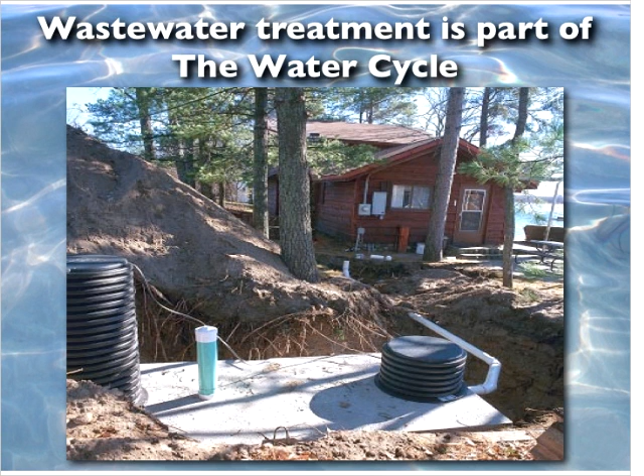Well, basically, this slide illustrates that the wastewater treatment is part of the water cycle. It shows what we typically see in our neck of the woods here in Northwest Michigan, the quintessential cottage on the lake with the wastewater system. Here we just have the septic tank, and it illustrates how close everything is, that we're dealing with a lot of fresh water, and we want to do our best job possible to protect that water. And we have certain requirements that we have to abide by to do that.

And what we typically try to do in these cases is size the tank appropriately based on the design flow from the house. Usually, in the case of a house, it is determined by the number of bedrooms. And at least in my neck of the woods in Grand Traverse County, we allow 150 gallons per bedroom as our design criteria. So if this is a 3-bedroom house, then we would be designing for 450 gallons per day.

And in our case here, we would have a 1,200 gallon septic tank. What's optimal would be 3 days of retention time.

And then as the wastewater flows out into the soil absorption system, or dispersal field, as I like to call it, we have a couple of actions that are going on. We have the water infiltrating, being absorbed into the soil, and going down through the soil and being treated as it goes, hopefully, and eventually it will reach groundwater and vent out to a lake or stream.

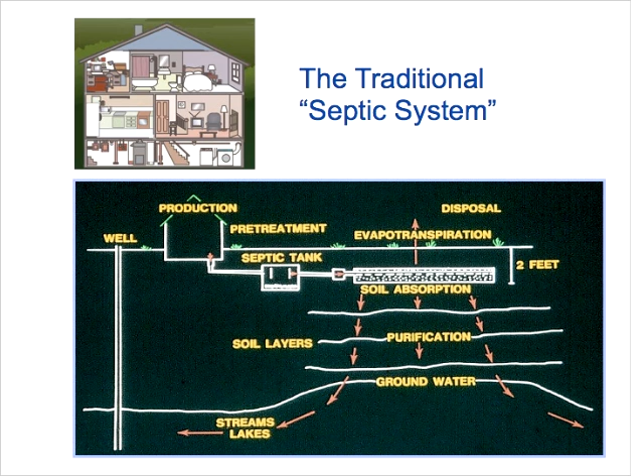We also have evapotranspiration, where at least during the summer months, when we have a nice shallow system, optimally about a foot of cover, we have a fair amount of moisture or water being evaporated through the soil into the atmosphere.

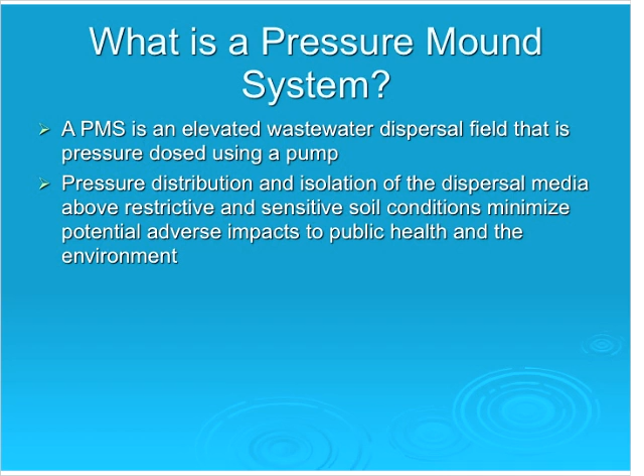Okay, what is a pressure mound system? Basically, it's an elevated wastewater dispersal field that is pressure dosed using a pump. The pressure distribution and isolation of the dispersal media above the restrictive or sensitive soil conditions minimizes the adverse impacts to public health and the environment. By elevating that bed and by pressure dosing it, we're basically taking the effluent from the septic tank and spreading it out over every square inch of that dispersal cell.

These types of systems don't work on every site. They require proper design, installation, and oversight. In our county anyways, a quick rundown of how pressure mound systems are dealt with here. We have permitted and designed mound systems since the early 70s, but until a few years ago, we only did it in the case of an existing home where we had a really bad situation and we had some pretty good soil, but maybe a restrictive layer at 2.5, 3 feet, or groundwater at that depth. Then we would allow the use of a mound system.

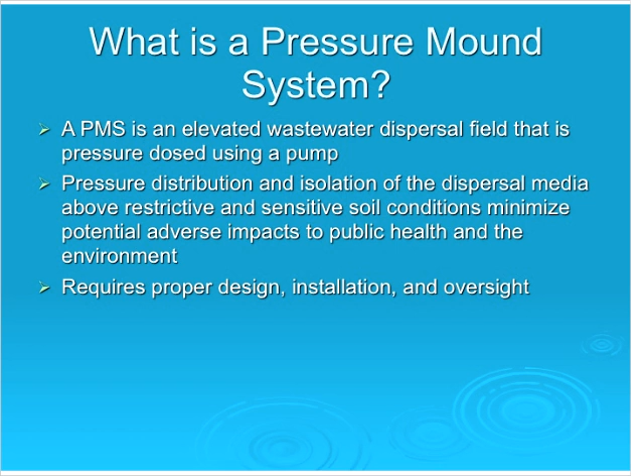Now we have a whole policy and procedure manual that outlines the criteria for doing mound systems for new construction, for existing homes, and all of that. And going back, we also require the design be done by an approved consultant, whether that be a professional engineer, sanitarian, or someone else that is qualified in that realm.

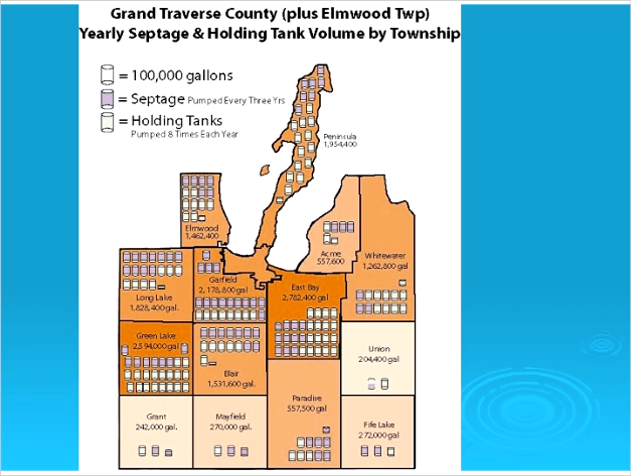And when we're talking about a mound system and soil treatment of the effluent, we really need to define soil. It is a porous natural body of mineral, air, water, and organic matter that changes or has changed in response to climate, topography, time, and organisms. So basically it is a living structure that changes all the time, and it can be affected by a number of different factors.

But in this case, when we're relying on soil to treat the effluent, we're relying on natural parent soil. We really want something that has a structure and a texture that is suitable for the treatment of wastewater and is going to remove nutrients. It's going to have plenty of air to encourage the growth of beneficial aerobic microorganisms that will digest the waste as it passes through the different soil horizons.

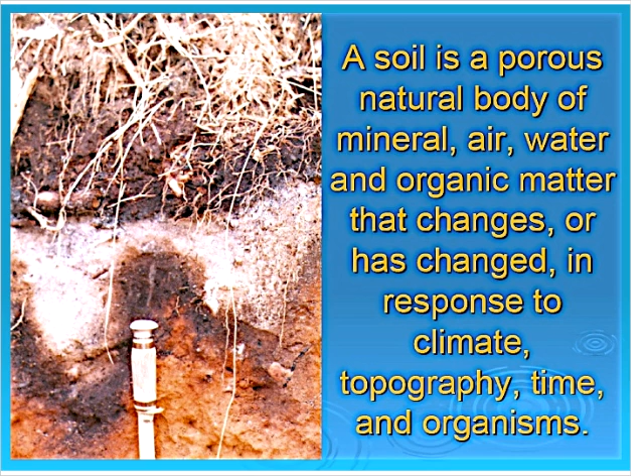And for the soil properties, what's shown here in this slide is a significant, probably a foot, topsoil layer, and below that it looks like a sandy loam. That's why I picked this slide, because that, in my eyes, is the most optimal soil to have as far as treatment goes.

And there's a lot of question in this arena, and a lot of the codes, including Grand Traverse County's code, were basically designed on the premise that the sandier the soil, the better, and that is true for just purely draining water and getting rid of water. But if you're looking at it from a treatment standpoint, that's not really the case.

If you just have very clean sand, very coarse sand, our code allows for the smallest drain field, which basically you get point saturation, and you get effluent running through the soil very quickly, and there's virtually no treatment. Well, I shouldn't say no treatment. There is some treatment, but little treatment as compared to a soil like a loamy sand or a sandy loam.

A sandy loam soil has fine particles in it. It has some clay content, and it also has some minerals within the soil that will treat the wastewater as it goes through the soil. There's some considerations to keep in mind here. Installation in these type of soil properties is very important. You have to be very concerned with compaction of the soil. You really need that soil structure to be intact, so you have to have an installation that is very conscious of compaction and minimizes compaction, and that's part of the plan.

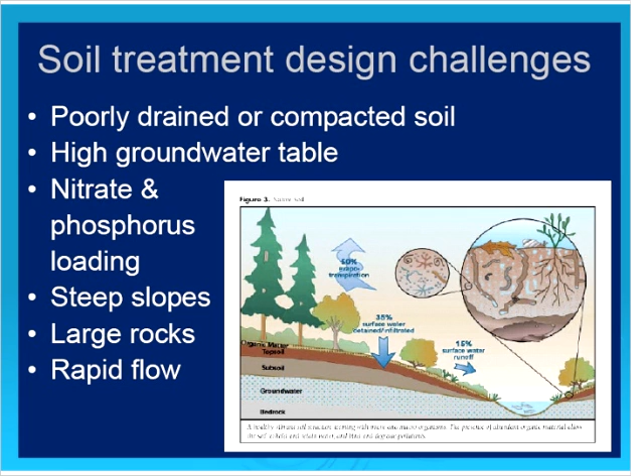Also, steep slopes are some of the bigger issues we have here, and also, like I talked about before, the large rocks and the rapid flow are things that we have to consider because we have such coarse sand areas and rocky areas that we have to deal with. And like I said, most of the sanitary codes or environmental health regulations say in those cases where you have very coarse sand that you're allowed to put in the smallest of systems, but really in those conditions we should have larger systems to deal with those rapid flow conditions.

Some of the soil properties that influence the wastewater treatment is the wetness conditions, where the groundwater table is. If we are looking at some soil that we're going to build a mound over, we need to have some unsaturated conditions to allow the wastewater to flow through that soil and be adequately treated. If you have saturated soil conditions, you are not going to initiate and sustain the correct aerobic bacterial growth that is needed to adequately treat the wastewater.

We talked about water movement through texture and structure. Again, a moderate water movement through the soil is the most beneficial for treatment. If you do have a more grainy texture, then we can make the system larger to accommodate that. And really, if we're looking at water movement through the soil itself for treatment, we're looking at it at a square foot application rate and what works best for that particular soil texture or structure.

Restrictive zones and horizons. What we're really talking about there is where is that seasonal high water table and where is the restrictive clay layer that we're trying to stay away from. In Grand Traverse County, I can't speak for the other surrounding counties, for a mound system, we need 30 inches of suitable natural soil in place to allow the use of a pressure mound system. What that means is some level of topsoil usually, and another down to 30 inches of natural soil in place, preferably a loamy sand or a sandy loam.

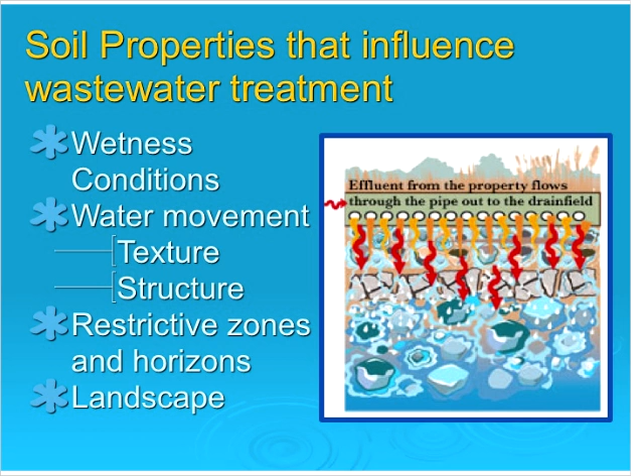Now also landscape, which Scott Dierks from JF will be talking about later. Landscaping is important around a system also, not only from the standpoint of planting, but also from the standpoint of moving surface water around your particular system. You want to make sure that any surface water created from a road or driveway, a roof, or anything like that can be adequately moved around the area and away from the particular dispersal field, so that you're not creating a saturated condition next to your dispersal field where you are dispersing the effluent.

Now, when we are talking about high groundwater, we want to raise the infiltration area with a mound. This diagram really illustrates the area that I'm talking about. We have the septic tank where we have the separation of the floating layer, the scum layer, and the sludge layer, and then we're drawing effluent from the clear zone into a pump chamber.

And keep in mind, right here where I'm highlighting on your screen, we would definitely have an effluent filter at this point. Once we're filtering the effluent to make sure no large particles get through, it goes to the pump chamber, and we want to ensure that pump is pumping the best effluent quality that we can get out there, since in the field we're using low pressure small orifices, low pressure distribution lines, which means typically 1.5-inch pipe, and the holes would be 1/8-inch to 1/4-inch holes.

But basically, if you look at this diagram of this mound system, at the infiltrative surface of the distribution cell here, we have all this sand beneath the distribution cell that the effluent is able to filter through prior to getting to the parent soil. So when we talk about a basal area, we're talking about from this toe to this toe right here. We have a much larger area than just that distribution box to allow the effluent to travel through. So once it reaches the parent soil, we have a much smaller application rate on the surface of the natural soils in place than we would with a conventional system in the ground.

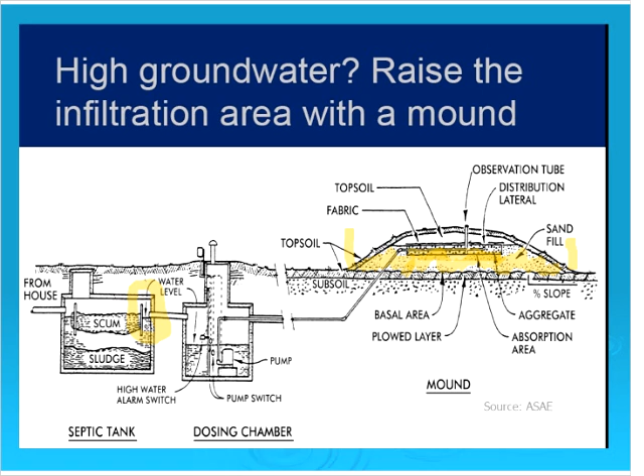Now this diagram kind of shows where our wastewater is coming from, and this illustrates what we're going to see going into the system. I just thought it was a good representation because people typically just think about the toilet, and that is really 1/4 of everything that goes in. If we look, laundry is the second highest, and then showering.

But one component here, because we also want to talk about not hydraulically overloading a mound system, which is surprising, is 13.7% for leaks, which is always a concern when you're designing a system. I think, if it's for an existing place, it's talking to the homeowner and making sure that they're aware of where all their wastewater is going.

Making sure that their plumbing is in adequate functioning condition, and that we don't have this extra water going into the system. And then also a consideration when constructing a new home is just basically using low flow fixtures. One of the other things is that in a lot of new homes these days they install humidifying systems on the HVAC unit for the winter time to take care of the humidity, and that can also introduce a lot of clean water into the system, which really doesn't need to be there.

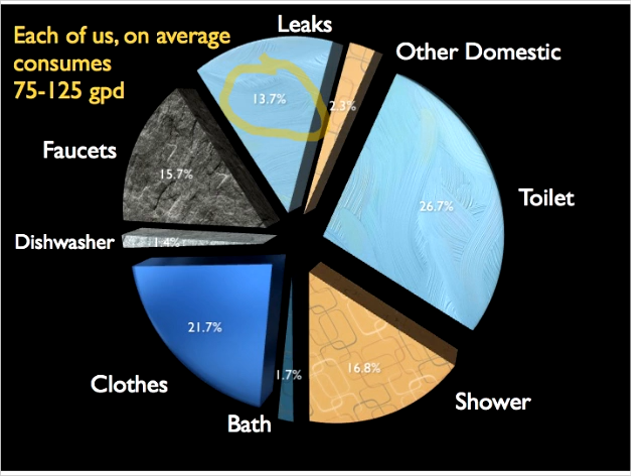We always recommend that those types of things be routed to a separate system, as well as a water softener. Supernate, which is the discharge from a water softener, the brine discharge, if you will. We always recommend that be routed to a separate drainage system. 99% of the time it doesn't happen. Plumbers are just used to basically routing water softeners into the sanitary. But those are considerations to think about.

This slide illustrates the soil treatment of septic tank effluent at varying soil depths. And the interesting thing here, this is tank effluent. This is not influent. This is effluent. This is what's coming out of the tank, so it's been treated using anaerobic treatment processes in the tank. And then after 24 inches of soil infiltration or filtration, the BOD reduces significantly.

The nitrate level goes down, or actually goes up, I'm sorry, because of the nitrifying bacteria in the soil. There would have to be a denitrification process to reduce that, which doesn't happen unless you're using a treatment type system. But anyways, as you can see, this is total phosphorus. TP means total phosphorus. And that from the tank effluent after 24 inches of soil goes down significantly. It should also be mentioned that the bacterial log detection is no detect after 24.

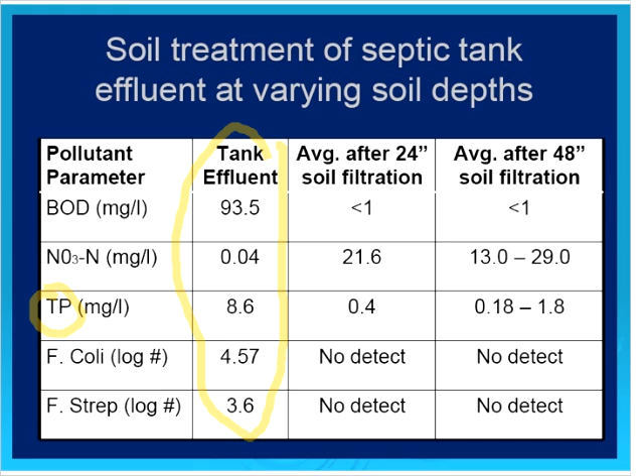But the thing that's interesting here is after 48 inches, things are not that much different with BOD, except when you get to nitrate and phosphorus. The nitrate can go either way, up or down, and that really probably depends on what's going on in that particular soil environment. Phosphorus just gets removed to a further extent because it comes in contact with more soil, which has more capability of trapping that phosphorus ion.

Well, when we're talking about these systems, we're talking about low pressure distribution, and the reason that we like to see low pressure distribution is because we get uniform distribution. We're not in a typical gravity situation. There are gravity mounds out there where you would just prop the house up really high, keep the tank up high, and then just build basically a shoebox in front of or behind the house.

In those types of situations, what goes in goes out. So if 50 gallons go in, 50 gallons go out, and you're relying on how well the pipe was installed, how level it is, how well it was backfilled to get uniform distribution, and it's very difficult and doesn't really happen. With a low pressure system, you are ensuring uniform distribution, meaning that every single square foot of that field is being dosed. You can set it up so your pump chamber pumps a small volume.

It can be spread over a large area. You're maximizing the soil contact time. You can play with your dose, so you have a large dose, long rest period, or you can do smaller doses, micro doses, if you will, in shorter rest periods. There is some debate over which one is best.

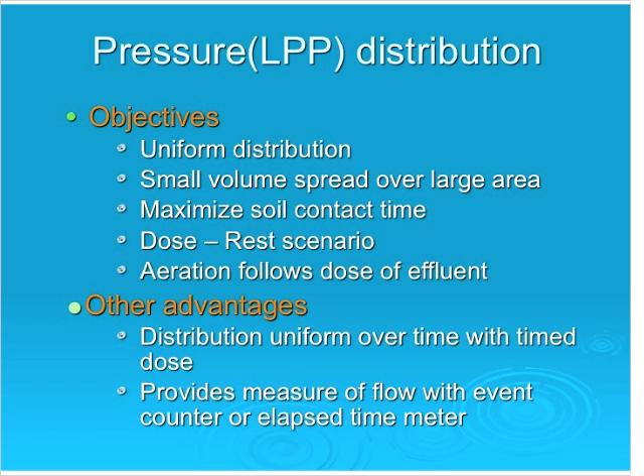If you know that you have a pump that is pumping 30 gallons a minute and it runs for 3 minutes, every time that pump kicks on, it's dosing 90 gallons. So if you keep track of that event counter, you'll get a very good measurement of your actual flow coming from your home or commercial facility. And really, there's very few residential homes where you see event counters. Most of the time you see them in commercial type applications.

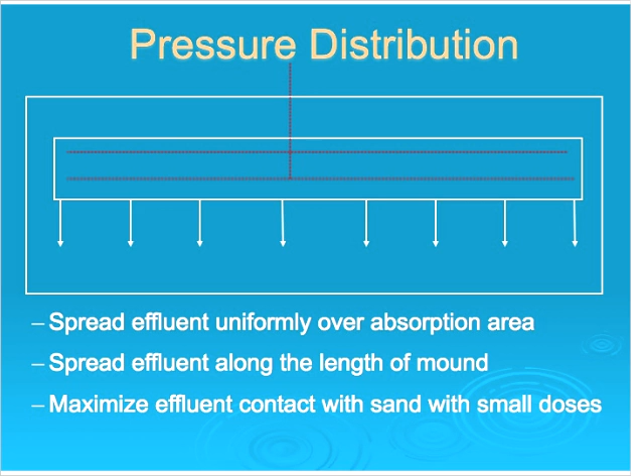This is just another diagram illustrating pressure distribution, where you are spreading the effluent uniformly over the absorption area. With a mound, you're going to be spreading it across the length of the mound. You're going to be maximizing the effluent contact with sand or whatever other type of soil that you have. Small doses, I think, are optimal, and you're going to get the best treatment that you can get over time.

Some of the components of a pressure distribution system: after it leaves the septic tank, you have your pump chamber, the pump controls, and a force main, which, depending on the length that you're going to be pumping, would typically be a 2-inch pipe, and that is going to go to your dispersal field, where you will have a manifold or a header, and you would have laterals with orifices. The laterals are typically 1.5-inch diameter. The orifices, like I said before, are typically 1/8 inch to 1/4 inch.

It should be noted that using the smaller diameter orifices is more beneficial as far as getting more orifices throughout the dispersal field with a smaller pump, and it is almost logarithmic as far as the number of orifices you can gain by going from 1/4 inch to 1/8 inch with the same pump. A lot of people have concerns with hole plugging with 1/8 inch orifices. You just have to make sure that you have adequate filtration and a larger residual head at the end of the lateral to ensure that you have enough scouring velocity to get through those orifices and to withstand any possible plugging.

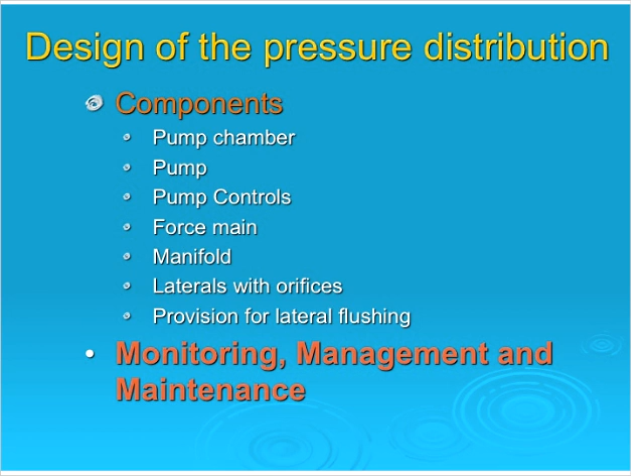We like to see long, narrow mound systems, maybe with a distribution cell of maybe 8 feet wide, 125 feet long, and you get a very long, narrow mound. What that does is it allows free flow of air throughout the mound. The longer and narrower, the better. Of course, a lot of sites don't allow that, so that would only be in the ideal situation.

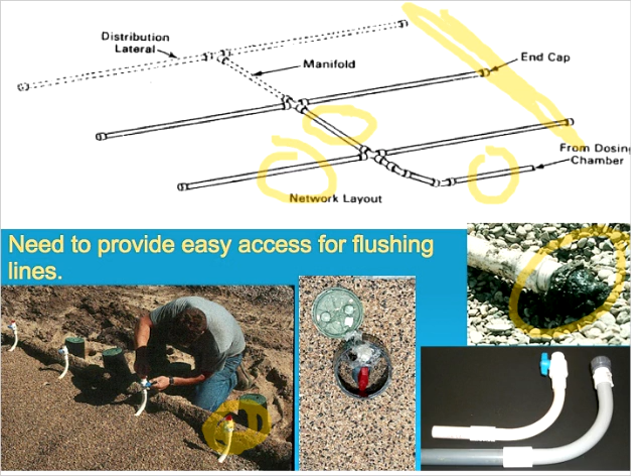What this shows here, if you can see where I'm marking, is the sweep 90s that allow access to the laterals for flushing, and this kind of shows what can happen inside these laterals, the buildup that could occur if you are not flushing those periodically and cleaning those things out. So I think that illustrates that pretty well.

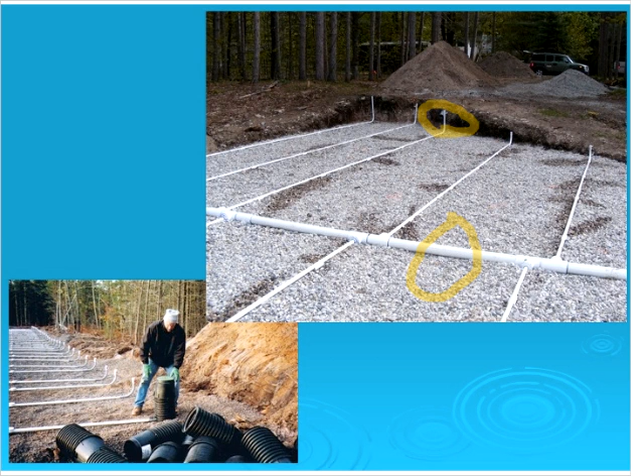This basically is just another picture of, again, a center manifold type system. This being the manifold, and this looks like it is a 3-inch manifold going to 1.5-inch lines, or maybe even smaller. But this also shows the sweep 90s on the ends for access to the lines, and you really can't see them very well, but these are the orifice shields that go over the small diameter orifice. The effluent sprays out of the orifice and hits the back side of the orifice shield and kind of trickles into the stone from there.

On this particular system, they are pointed down, which can be either way. I think a lot of people don't use orifice shields if you're pointing the holes down, but I think it's a good idea because there's a great potential, especially in a stone system, where you could have a stone or a rock plugging that small hole. This over here shows a round orifice shield on a hole that's pointed up. So it just kind of shows you the different orifices or orifice shields that you could have.

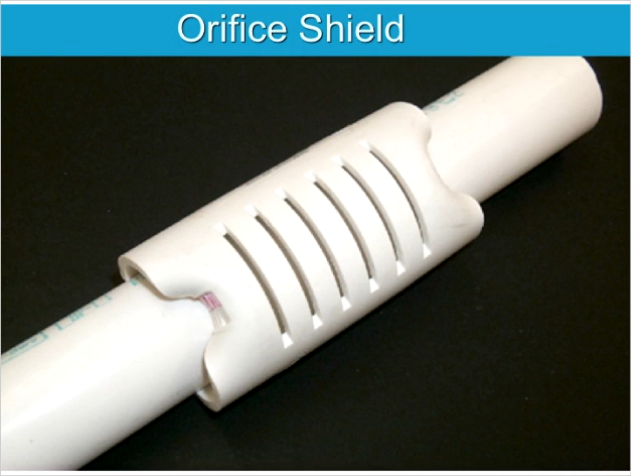And right here, this gentleman is putting on a valve cover, which is kind of typical you would see in irrigation, to protect that sweep 90 and the ball valve there, and to limit access to it as well. And here is our orifice shield. This is just one kind. There's also ones that are round that would clip on the pipe as well. This one just snaps on the pipe, and the orifice might be right here, and it might be, like I said, anywhere from 1/8 of an inch to 1/4 of an inch in size.

When we're talking about management and maintenance of our mound system, our pressure distribution system, we want to inspect the observation tubes for ponding. I guess I really didn't talk about observation tubes, but basically what we typically see is a 4-inch piece of pipe with holes drilled into it that is placed inside the stone of the distribution cell. It would have a cap on it, and it would come up above the final finished grade of the mound.

What you'd want to do is pop the cap off and look into the system. Really, you're looking inside the stone where a water level may be. Ideally, you don't want to see any water ponding inside that observation tube. But anyways, it's good for monitoring the condition of the stone as far as the level of water that may or may not be in there.

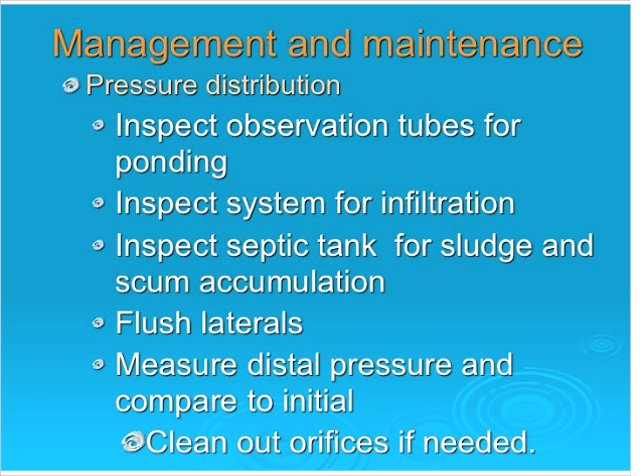If you check it and it's 6, 7, 8 feet, then that's a good indication that you are getting some hole plugging in the laterals. Because less effluent is going out through the orifices, you have more pressure built up inside the actual laterals. And that's the next point here that I already went into. And of course, if you were in that situation, after you check the residual head pressure, you would send a bottle brush down there if needed, or a jet hose to clean out those laterals.

And some of them actually have a circuit breaker inside, which is beneficial if you're doing some maintenance on the mound. You can actually hit these circuit breakers to turn off the power before you pull a pump, pull some floats or whatever you're doing there.

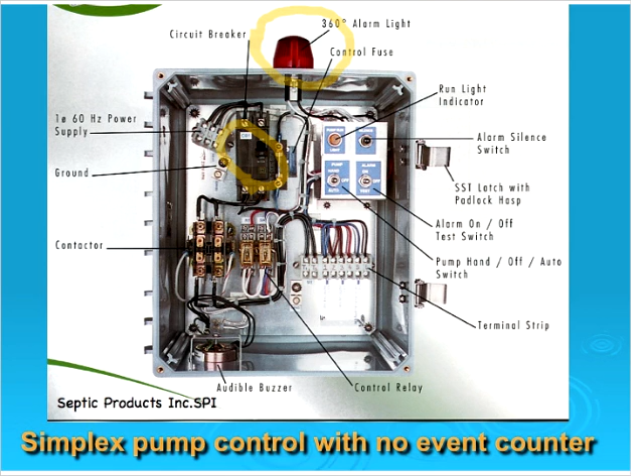A big component of the system would be the actual alarm, and here's the audible buzzer. For a homeowner, if you hear this thing going off and you see the light going, you have a problem, and basically the first thing you need to do is stop running water into the system, and then you want to call your maintenance provider, or if you're a handy homeowner, you may want to pop open the pump chamber and check things out, see what's going on.

Some of the other things that you may see in a control panel would be a run light indicator, meaning that this light is turning on when the pump is running. And there are some control panels out there that actually have LED lights that show when a float is in the on position, which can be helpful if you're trying to diagnose any problems or making sure that the system is running properly.

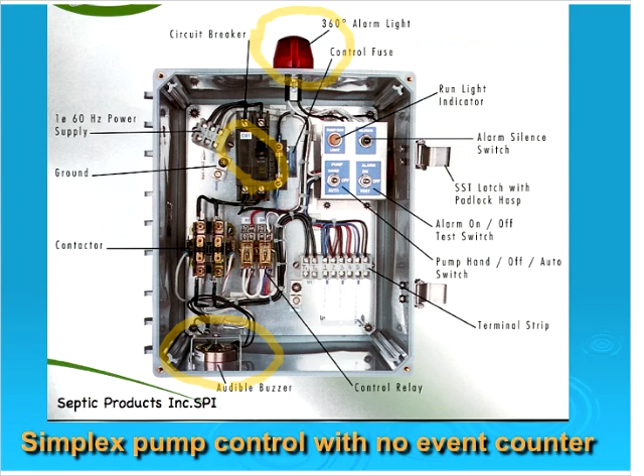In recent years, because of the hazards of mercury, a lot of manufacturers have been getting away from mercury and going with mechanical. Not quite as good as mercury, if you can imagine. I mean, mercury, being liquid metal, can flow pretty freely. A mechanical type float, you can always have some problem in there where the ball bearing is not gonna contact.

And I see Larry Stevens has a comment: from a maintenance standpoint, both an event counter and an ETM should be included, and I would agree. We don't have it in our code that we have an event counter, and for any future revisions we probably should include that.

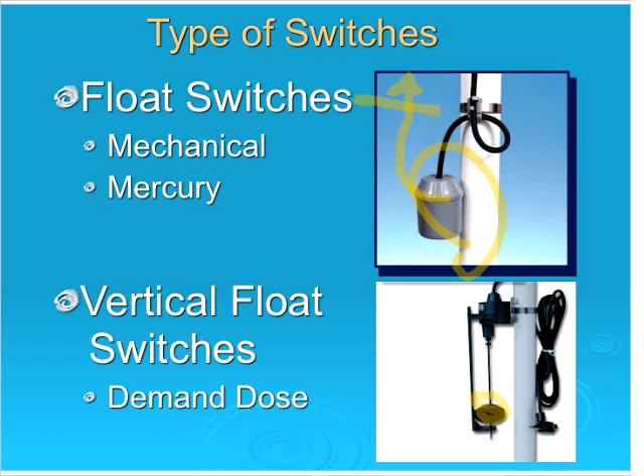Next is a vertical float switch, and this is also a demand dose, and this simply is what it says, is that when the effluent rises, this little guy right here just moves up this rod and turns the pump on. Pretty self-explanatory.

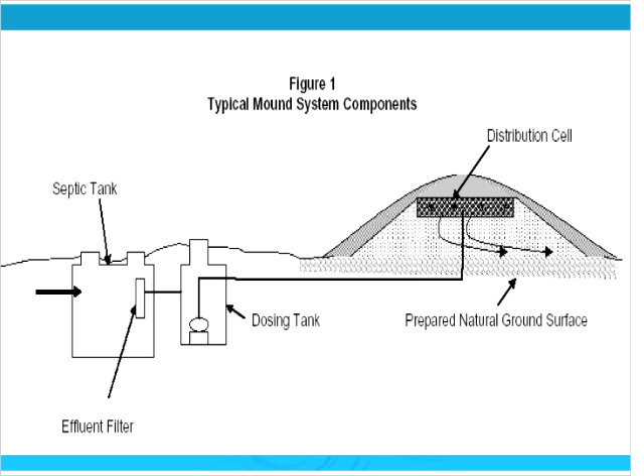Again, this is really just showing the typical mound system components with the septic tank, the effluent filter, the dosing tank, and the mound itself with the distribution cell.

And I wanted to talk a little bit about minimum horizontal isolation distances. And what we did in Grand Traverse County is we pretty much adopted the DEQ, now the DNRE, guidance mound document. We adopted their isolation distances, and some of the ones that we have a challenge with, especially if you're looking at a lakefront lot or a riverfront lot, is getting the 100 feet from surface water in order to use a mound.

But we also have provisions for doing an advanced treatment system where if you're inside the 100 feet, then we can pre-treat the waste to allow that application to be used in that case. Typically, we have 50 feet from an individual well. From basement foundations, we have a 50-foot isolation.

And this should be noted that we really only adhere to that in a situation where we have new construction, and it has an asterisk that says the downslope edge of the greenbelt area may be located within 25 feet. And really what that means is if you have a sloping site and the house is down gradient from where the system is, there's a greenbelt associated with the mound, and the basement would need to be 25 feet from that. And like I said, if we have an existing home, existing situation, we don't really follow this.

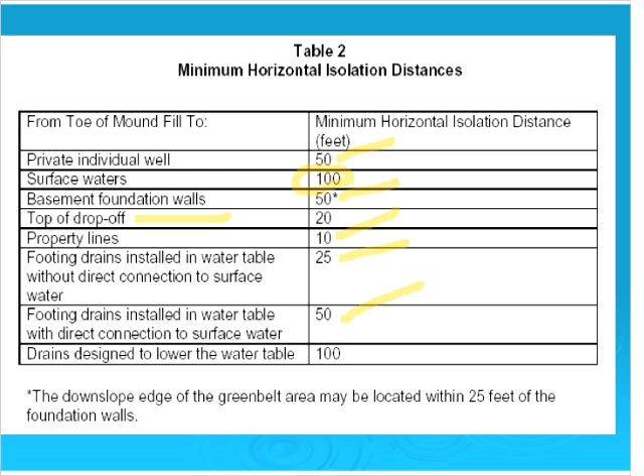Typically, 10 feet from property lines. That's not much different. And then footing drains installed in water table without direct connection to surface water, we want to be 25 feet. And then footing drains installed in water table with direct connection to surface water, 50 feet, which makes sense, I think. And this we don't see very often: drains designed to lower water table. I think that's more of a downstate concern. But we don't see anything like that around here too much.

This diagram kind of shows us a site plan, and this is what I mean by the greenbelt area, and this being slope going... whoops, losing my arrow here. Slope going this way. I guess it shows it over here. And we only require this downslope greenbelt area where you don't have any other homes, anything constructed in that area, even sheds or garages or whatnot, which could be impacted from the effluent from the actual mound system.

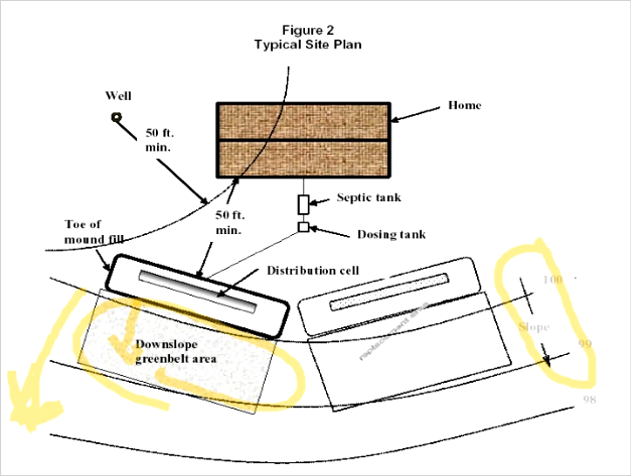You want this greenbelt area to exist because the effluent is going to be moving in this direction, coming out of the basal area of the mound, and you want it to have an undisturbed area where good treatment can take place.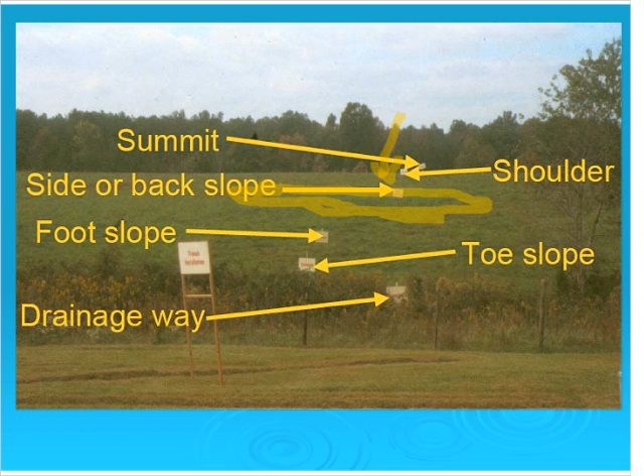You don't want to put one necessarily up here, and you don't want to put one down here because you are going to have more saturated soil conditions in that foot slope area and also at the shoulder slope area. Where you have rapid surface water movement, this area is going to have the most unsaturated conditions and the best location for a dispersal field. And also, because we have a drainage way here, which may or may not be containing water, the most isolation from that.

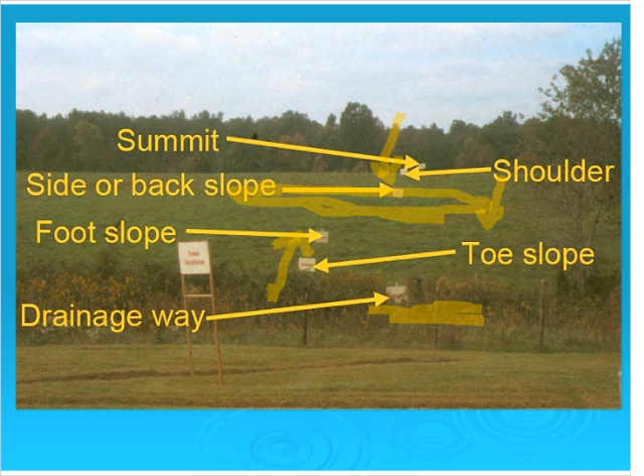And I decided to go with this design for a couple of reasons: ease of installation, and I just thought it was a really innovative and good design for a mound system using low pressure.

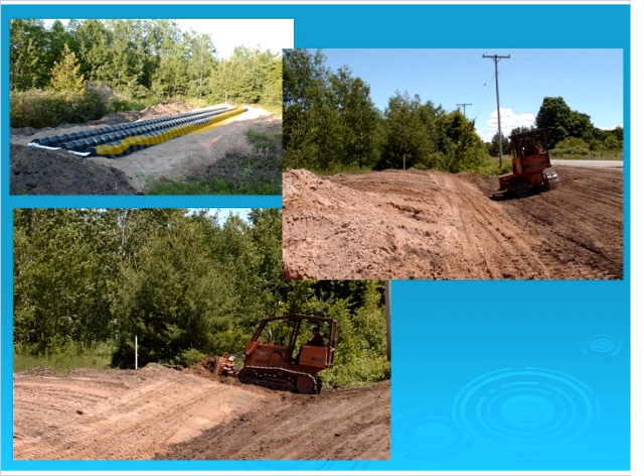Gravity, I'm not so sure, because these chamber type systems are open on the bottom. In a gravity situation where you're putting it into a mound, so you have a sensitive site, you're going to point load this front end right here, and you're going to have saturated flow in this area until a biomat forms, and really that's going to take a long time, and it's going to slowly creep towards this end. So on a sensitive site, I would not recommend using a gravity type mound system. Low pressure mounds work great.

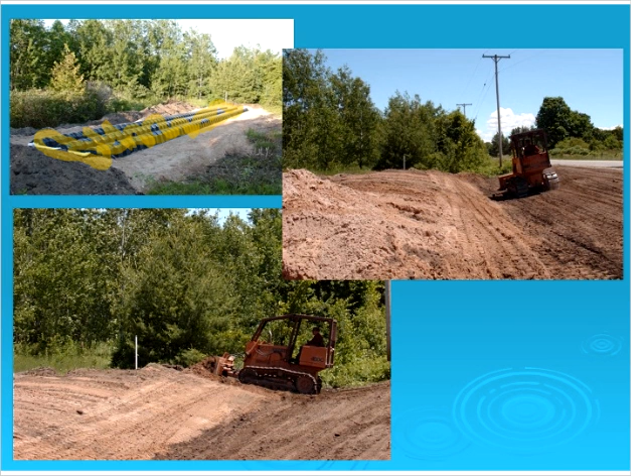Also illustrating the use of tracked equipment. Obviously most bulldozers are tracked. However, if you don't want to use heavy tired equipment like a loader or a heavy backhoe on a site like this, as long as they stay off to the side, it's possible they could use that. But more appropriately, using tracked equipment like a tracked excavator would be optimal during dry weather conditions.

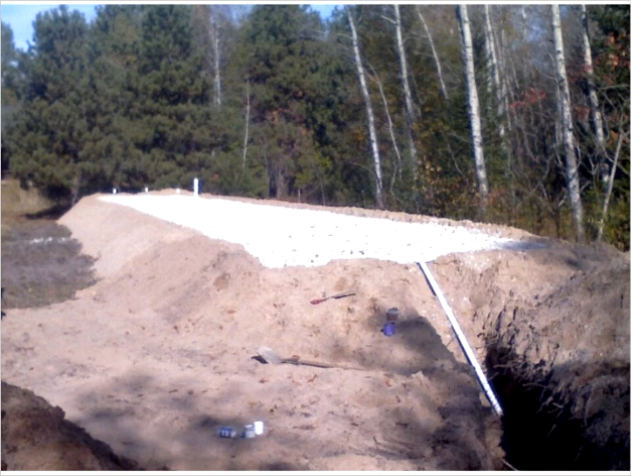A lot of people are really into their trees, and I love trees too. But in this case, something's got to give, and I think for the overall functional longevity of the system, having trees that close is probably not the best idea.

This picture also illustrates a mound system that was constructed here in Grand Traverse County. It is pretty self-explanatory: we have about 18 inches of fill where this 1 foot layer of stone and pipe was installed on top of that, and when it's all said and done, we'll have about a 3.5 foot mound. This shows an observation tube down on this end, and I think there's another one here, but we can't see it.

And this shows the 3 laterals with 3 sweep 90s, which indicate the access to the laterals for maintenance, for flushing and cleaning and checking the head pressure and whatnot.

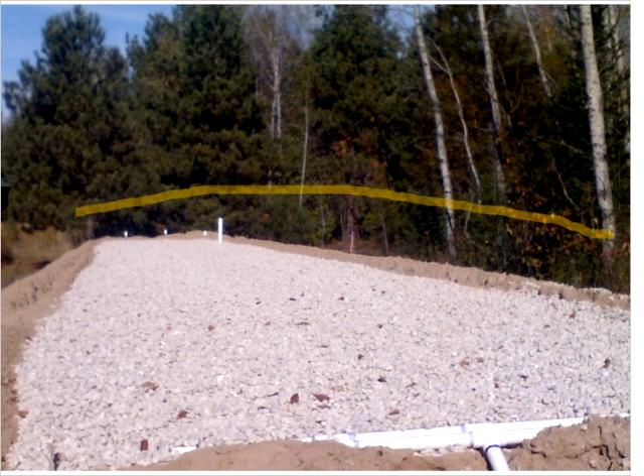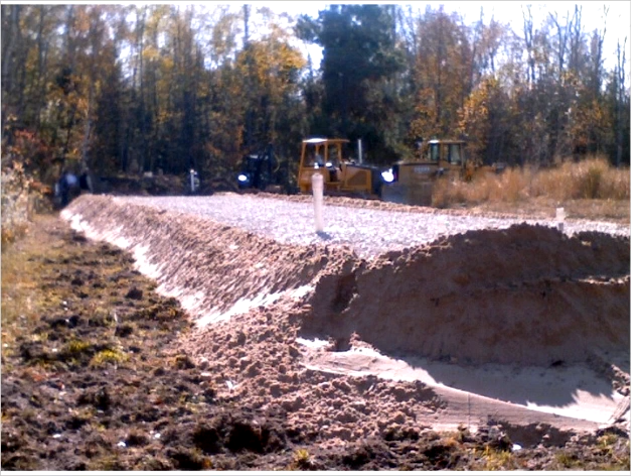This is another picture of that same particular mound. Even though these trees look like they are closer than they are, they're a good 20 feet from the base of this mound, which I would say is adequate, depending on the type of tree. If these were all willows, I would say maybe 100 feet would be good, but no, I'm just kidding. Going on, just another picture of the same particular mound.

As you can see, this is where the topsoil on the ground was roughed up. It was mowed down, and the excavator, it doesn't show it here, had a mini excavator which has a very light pounds per square inch compaction rate, and he got on this and prepared the soil on the ground surface prior to applying the sand fill, and used the teeth of his bucket to basically scrape up the surface and prepare the soil for placing the sand.

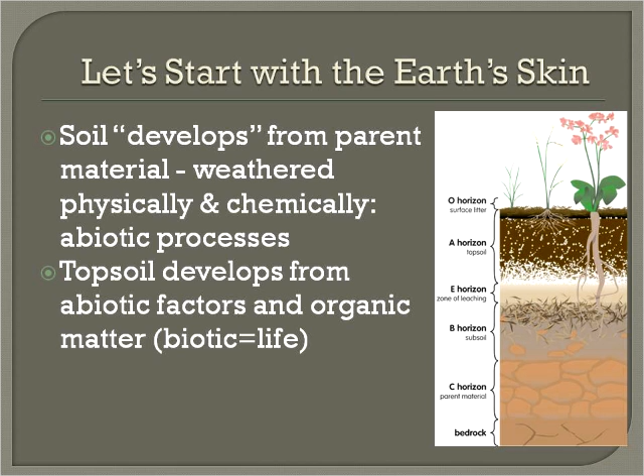But the key here that I'm going to start to talk about is the biotic portion of the soil, the life portion of the soil. I've read a statistic that in terms of diversity of life, there's actually more diversity in that rhizosphere across the planet than there is above the rhizosphere. Granted, most of that diversity is in single-celled bacteria organisms, but there is a tremendous amount of life in the Earth's skin, if you will.

Common organisms that you can find in the rhizosphere, bacteria and fungi, are probably the most diverse, prominent, and abundant species in the rhizosphere. Nematodes, arthropods, protozoa, earthworms. Some call earthworms the planet's ecological engineer, basically converting organic material, creating burrows, and also creating surfaces for other plants, other organisms to live.

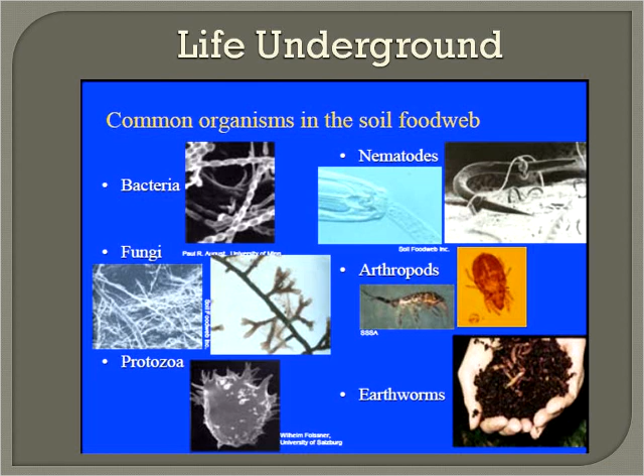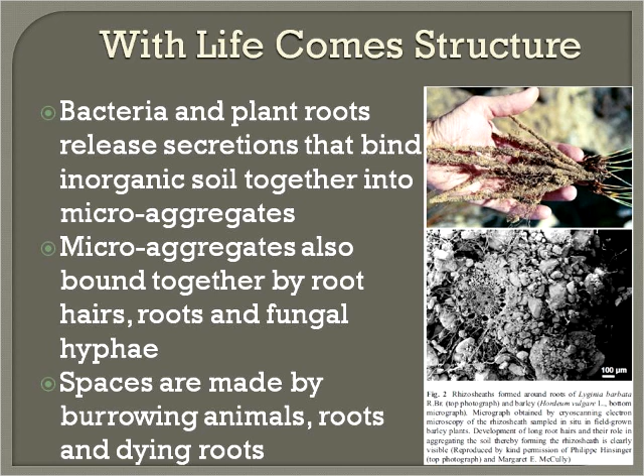With life, so to speak, in the soil comes structure. The bacteria, the fungi, the plants, the plant roots have what are known as exudates. Basically, they secrete enzymes and proteins that help bind inorganic soil together, the abiotic part of the soil, the mineral part of the soil, into microaggregates. These microaggregates are also bound together by root hairs and fungal hyphae. And then within the soil medium, spaces are made by burrowing animals, roots and dying roots, literally creating pore spaces within the soil and structuring the soil as well.

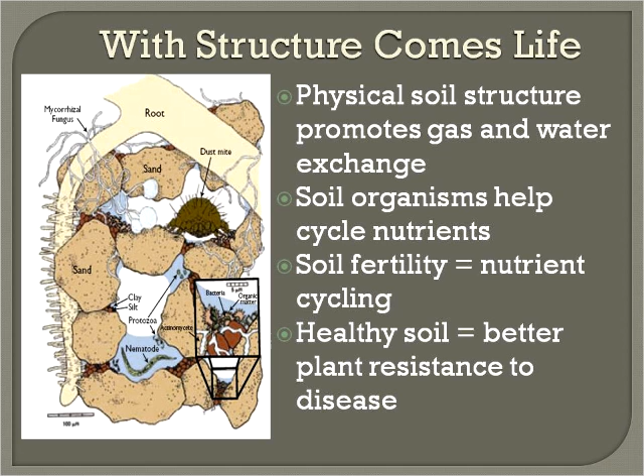With structure comes life. So those two titles obviously are circular, the point being that these are self-reinforcing processes. If you have a healthy soil and you have vigorous life in the rhizosphere, the life in the rhizosphere is changing the structure of the soils. The physical structure via roots is actually promoting gas and water exchange. The soil organisms themselves help cycle nutrients, and soil fertility or soil health is largely dependent on nutrient cycling. Other benefits that accrue from a healthy soil, a soil filled with life, of course, are better resistance to diseases and pests. It's a more robust system.

So the benefits, so to speak, for us, and I like to talk about this in terms of exploiting the healthy soil. I think sometimes it puts it into perspective. Again, I say that somewhat facetiously, the idea being here to start to think of ourselves more as stewards than having dominion over the planet. So these benefits that accrue from having a healthy soil: better water storage, better water infiltration. Healthy soil with vigorous root growth is going to help soil stay in place. Not only will the soil take care of the kinds of pollutants that come through domestic sewage, but you can actually degrade hydrocarbons.

Even other chemicals like PCBs, even though it's a slow breakdown, can be broken down in soil. Pesticides, the same spot, so to speak, where you can absorb phosphate ions, or I should say, the same medium that binds phosphate ions can also bind heavy metals.

Healthy soil will also convert fertilizers to soluble forms available to plants, like phosphorus. Healthy soil, again, promotes rapid and vigorous root growth. And just to remind ourselves that this rhizosphere, the skin of the earth, is basically the growing medium for much of the planet's primary producers, basically where we get a large part of our food.

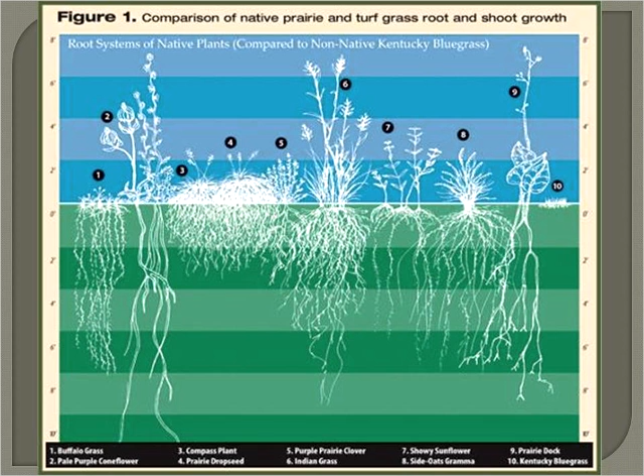What does that mean? Go back to this notion that plants are literally changing their environment. This figure is taken from some work at Iowa State. They went out on a riparian area. It was riparian cropland. They replanted the cropland in various riparian buffer species, switchgrass, mixed grass filter, and silver maples. So they planted the same area that had been farmed, and I think it was mostly corn.

They went out 5 years later, ran infiltration tests, basically in the pasture, in the corn area. I guess they were also planting soybeans. And then in the areas that had been replanted in the grass filter, switchgrass, and silver maples, you're looking at an increase in infiltration rate, the percolation rate, on the order of something like 5 to 8 times within 5 years.

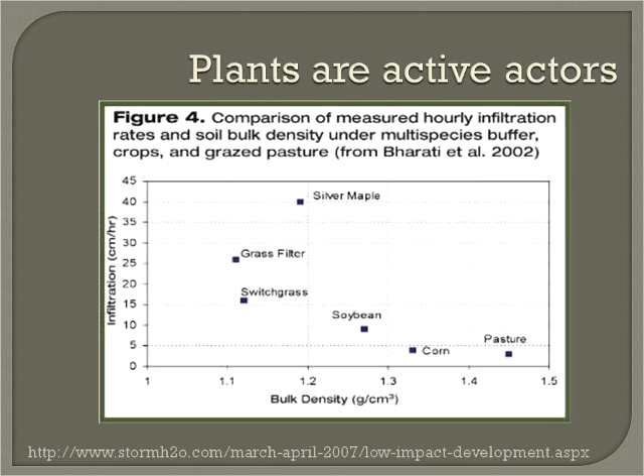Basically, again, the notion here is that the plants are not passive. I came to this thinking they were something in the background, but they're literally changing their own environment. One other thing I wanted to mention, again, talking about plants as active. This is another graph representing relative evapotranspiration rates. You see soil is the open square. That's the evapotranspiration rate for this particular period, basically a summer period in the eastern United States.

Water is the closed diamond, and then you have Salix babylonica, which is willow, Acer rubrum, red maple, and then Typha latifolia, which is basically cattail. And I just want to point out that if you look at the willow, going back to water use by plants, in the closed triangle, you're looking at evapotranspiration rates that are 4 to 5 times higher than evaporation from a straight open water body. So significant water use.

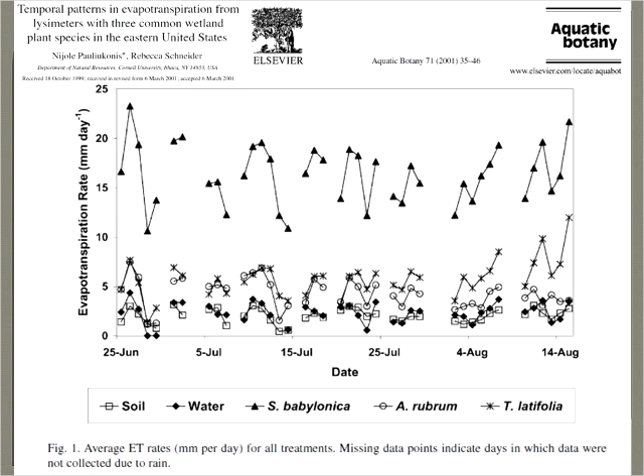These attributes of plants are things that we need to understand, both from the respect of what we can exploit, as well as maybe in some cases what we need to avoid. As Dan alluded to, it's probably not a great idea to plant a willow next to a drain field, where that willow is going to go around essentially hunting for water, and with that drain field there, it's going to find a nice convenient spot to grow into.

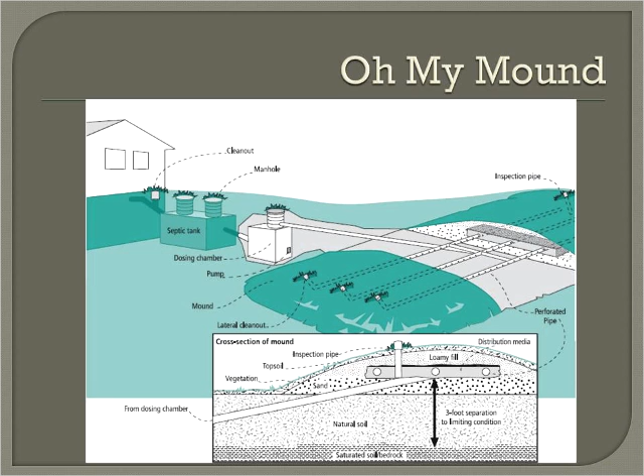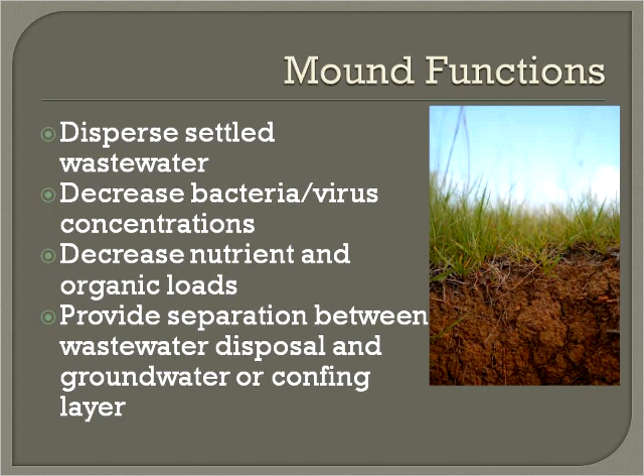Okay, so Dan did a great job detailing mound systems. I'm not going to talk about the mound system design per se in terms of moving water within the mound. What I want to talk about is what we do in order to, I guess, wastewater scape around the mound. So the mound functions, again, Dan went through this, so I'm not going to cover that in too much detail, but jump right into rules for wastewater scaping. So I had summarized these rules.

Anyway, I've summarized some of these rules, some from Wisconsin, some that we've developed as a firm moving forward. First point is know your options. And again, this is just a summary. What I mean by that is, for instance, if you were looking at a lot and it was brand new construction, being thoughtful about where you're going to place everything, looking at the lot as a whole, and then paying attention to where your mound would go and how you could landscape, or wastewater scape, if you will, in and around your mound, either to hide it, to de-emphasize it, and potentially to take advantage of some of the benefits, particularly of native plants.

Get involved as early as possible. Again, this is really targeted at homeowners. I'm saying here from the perspective of design, from the perspective of location, from the perspective of understanding your entire landscape for your entire lot, and then working within that context. Of course, respecting setbacks and gravity. Again, Dan covered a lot of that.

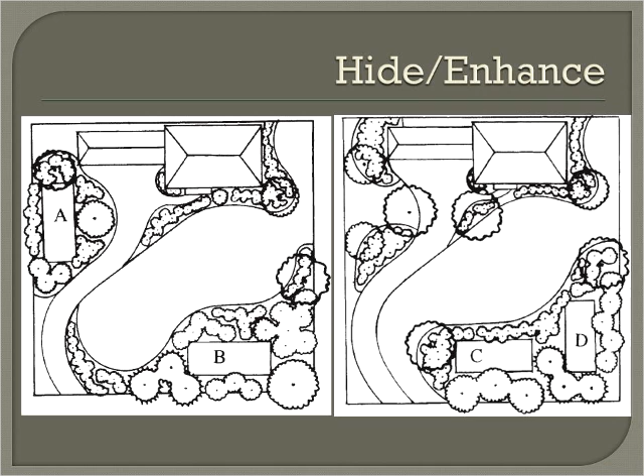So you can see basically this kind of continuous, graceful concept line for layout, dividing the types of landscapes. You can see smooth, continuous, curving line, no straight lines. It's more pleasing to the eye. And again, trying to move the focal point away from the mound is another thing to keep in mind.

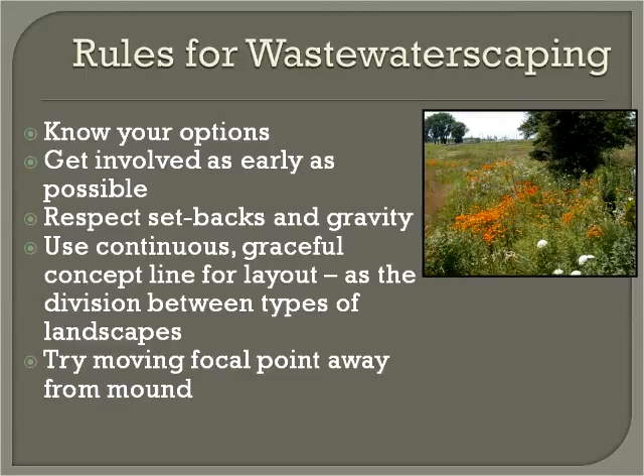Continuing on with these wastewater scaping rules. Another option is extending or melding basically your rise in the earth where you've got your mound, turning it into a berm, bringing that berm back into other existing landscapes. You can use retaining walls, but only on the upstream side, so you could work up against a driveway, that kind of a thing. As I mentioned before, always design with the entire space in mind. And whenever possible, use natives.

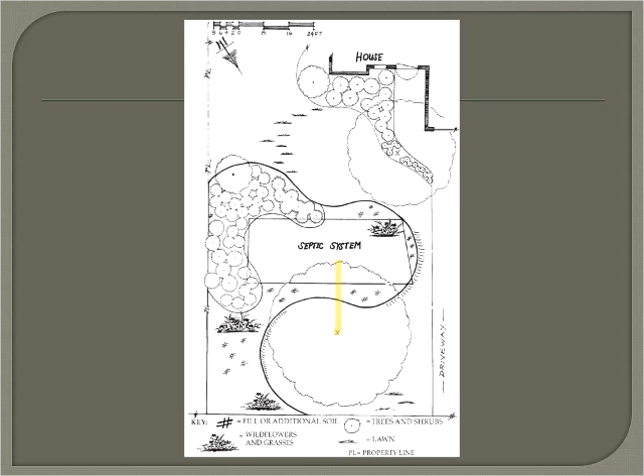Again, here's another layout. You can see here what we're looking at on most of the septic is lawn. The large tree on kind of the south side there. Getting back to Dan's point, you're going to see a couple of recommendations at the end of this slideshow. One of them being our recommendation is to plant trees so that the setback from the septic system is at least the radius of the full crown of the tree. So for instance, in this image right here, there's a little encroachment upon that rule. If it were us, we would move the tree back so this edge was towards the bottom of the mound system, so the tree would actually be located down here.

Again, the notion being trees, particularly some species with deep roots, are going to go looking for water. If you've got a system where you have small perforations, an eighth of an inch, a quarter of an inch, there's always a chance if you set this stuff too close to your system, you're going to start to fill in those holes, and it's going to be a real nightmare. You're not going to be able to spray them to simply get rid of the roots. It's not going to work.

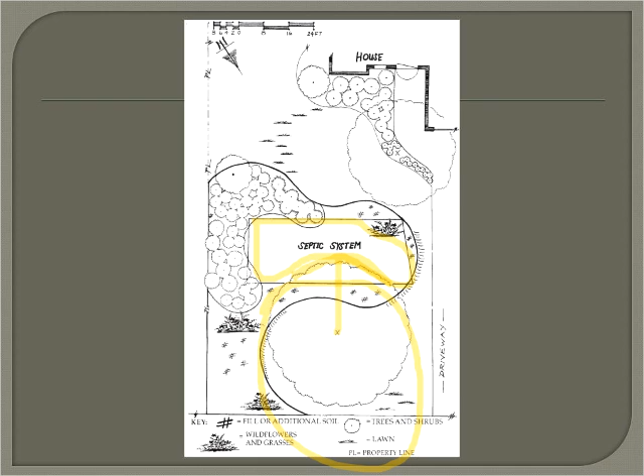So now we're talking about, and you'll see again as we talk about rules, really predominantly grass on the top of your mound system, your discharge system, in this case, I think fescues is what we recommend. You can get a great set of healthy fescues that will survive both in the shade and in sun. There are drought-tolerant fescues, and our recommendation is to let them go, not to mow on top of the discharge system, the mound system, not to drive on top, and then basically having these accent areas or these areas that you're going to hide the mound.

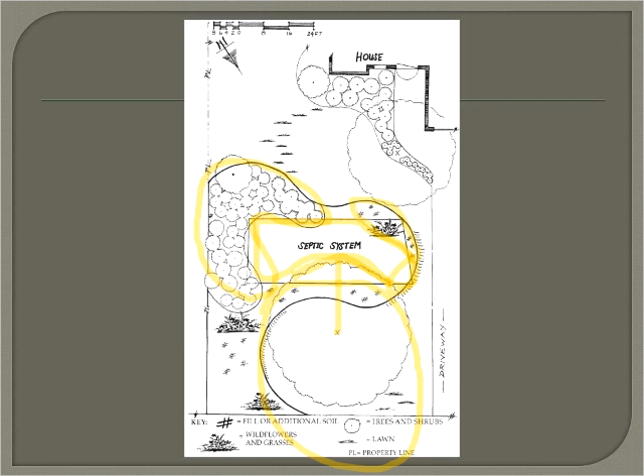And then we would say too that you could probably get some of these flowering natives and start to accent too, and actually come up. You can come up, I would say, on the edges and the sides and the corners with your natives, but not covering your entire mound with deep-rooted prairie native species, because again, you may run into issues with those roots looking for water.

Okay, one quick little commercial. I just want to mention treatment wetlands. Dan had talked about if you had sites where you were particularly constrained, you might have to do additional treatment.

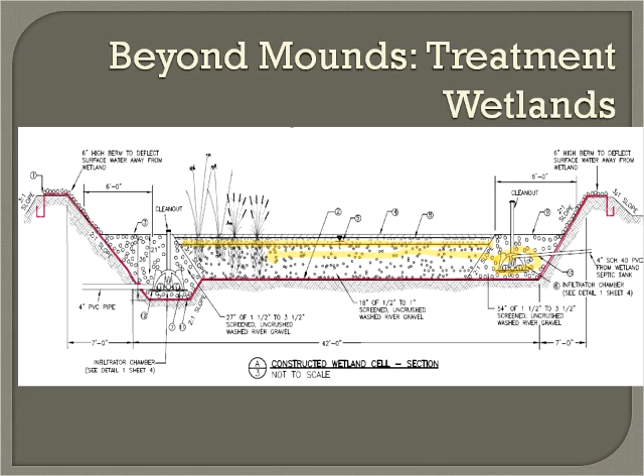These are systems that we design where the water surface is just below the surface of the system, so you never see ponded water. The water comes in on this side, flows through the planted medium, and then discharges on that side. And these systems can look like this and this.

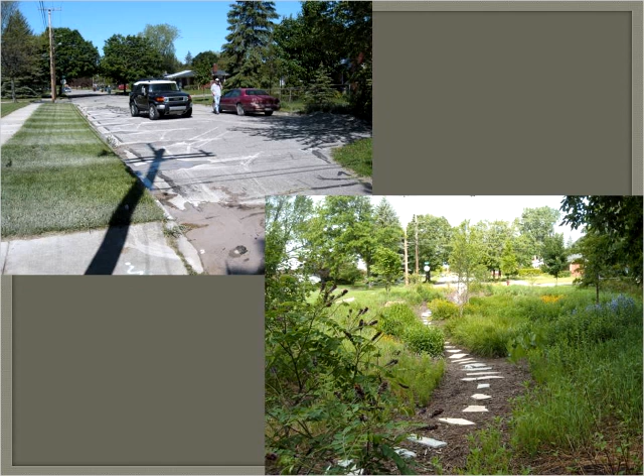This is a 150-foot long, 50-foot wide street stub in the city of Ann Arbor. We basically took the pavement off and turned it into another rain garden, and it's essentially now become a mini park.

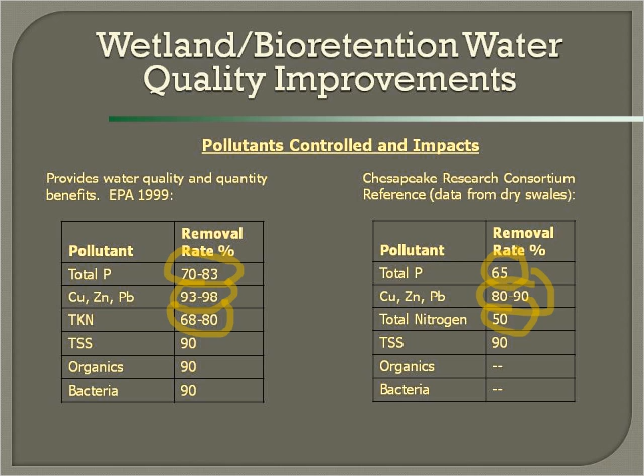These native planted swales, again, you're looking at fairly significant phosphorus reduction, metals reduction, nitrogen reduction, total suspended solids. Other things I want to mention about native plants: drought and disease resistant. These are plants that have grown up over thousands of years within the Michigan climate and Michigan pests. They have evolved to take advantage of their own little ecological niche, and tend to be very robust systems.

One of the other beautiful things about native plants is once you get them established, and a lot of times it will take a couple of years so that they're growing vigorously and you keep out invasive plants, once they are in and doing well, you don't need to water them, you don't need to fertilize them, and you don't need pesticides. Many natives are long-lived perennials.

Another advantage to flowering natives, of course, they're going to attract butterflies, hummingbirds, bees, both domesticated bees and native bees, and other beneficial insects. The natives are often hardier than their cultivated cousins or imports.

One of the nice things about native plants in terms of their effect on the rhizosphere, something on the order of 25 or 30% of the native plant roots die every year, and you're going to get regrowth, but that loss of root below the surface basically becomes food for organisms, and also it sequesters carbon. So you have all that carbon in the plant tissue being broken down in the soil column, and most of it staying in the soil column.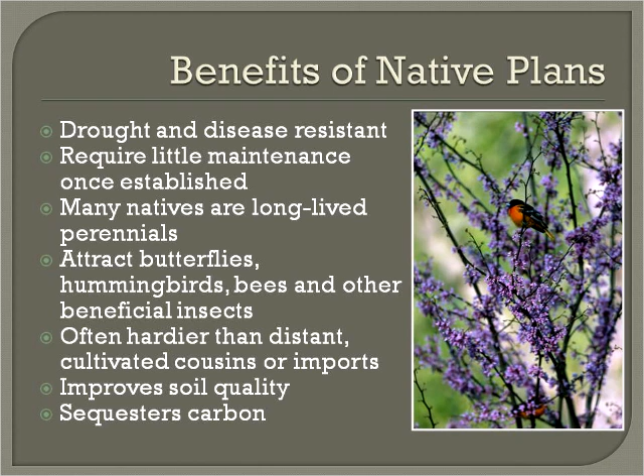You can actually go to the Chicago Climate Exchange now and buy climate credits for the conversion of landscapes to either prairie or forest, because both native prairie and native forest landscapes have been shown to sequester large amounts of atmospheric carbon.

All right, to the guidelines. The first guideline is directed for the mound, but anywhere around the mound, we would certainly recommend having at least 6 inches of topsoil.

Again, you're going to need soil structure, you're going to need the right pH, you need to be able to create an environment where plants can thrive, so you need at least 6 inches of topsoil. Do not till on top of the mound. When you're building, of course, this is the typical soil erosion and sedimentation control recommendation for all sites that at some time or other have been swiped bare. Of course, you want to establish ground cover as soon as possible.

When working in these systems, if these are live systems with wastewater running through them, please take the proper precautions, for instance, wearing gloves. As far as on top of the mound, again, we would recommend non-water loving, or I guess another way to say it is probably shallow-rooted plants, plants that either don't need a lot of water or don't grow very deep roots. No trees or shrubs, please, on the mound. And again, as Dan showed and as we had recommended, offset those trees so that you're at least as far back as the crown of the tree at full growth.

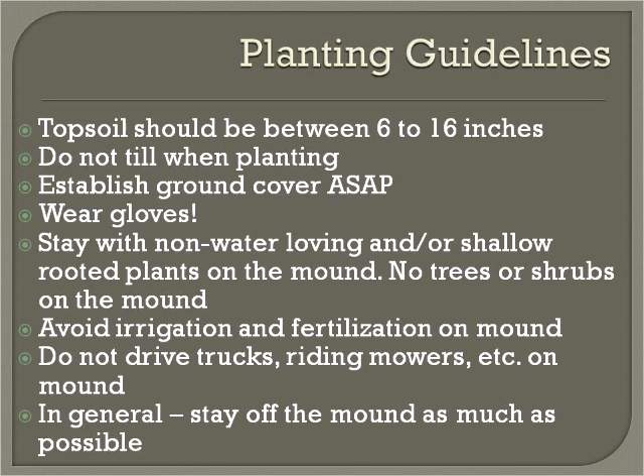I wouldn't plant edible plants on the mound, no vegetables, no herbs. We would also recommend inspecting the mound at least annually for animal damage. Control animals at the first sign of tunneling and burrowing. They can do a lot of damage quickly. There are root barriers that you can find. Basically, they're like geotextile fabric with, I think it's trifluralin. It's a plant growth inhibitor.

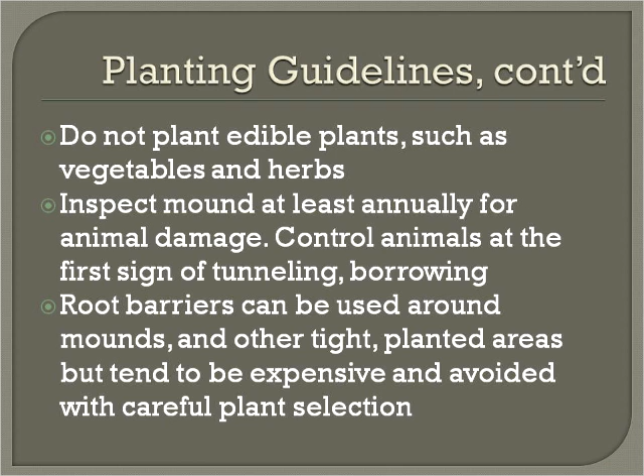And we have used those in situations where you're doing urban tree plantings. You want to keep the roots from growing outside or underneath infrastructure or through infrastructure, but the materials tend to be expensive. And again, if you think about your design, you plan accordingly. You shouldn't have to use root barriers with an adequate planting plan.

So again, to sum up on this, we would recommend a fescue mix on the top of the mound, and then on the sides, even a little bit on the top, you could mix in low-growing native herbaceous plants, and I'll have a list here in a minute. Some examples include things like violets in the shade, or wild geranium in the shade, or something like butterfly weed in the sun.

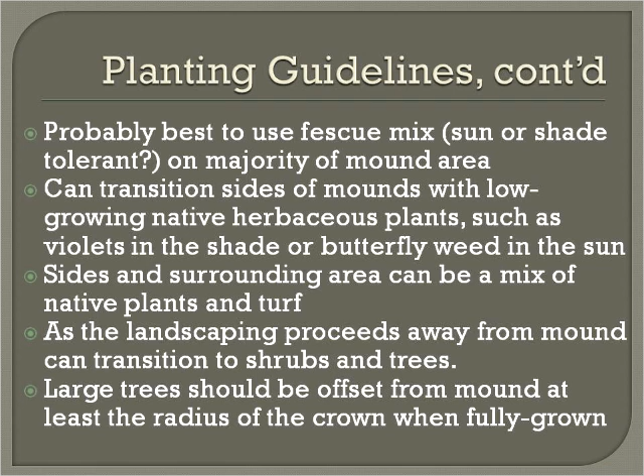The sides and surrounding area can definitely be a mix of native plants and turf. And then as your landscaping plan proceeds away from the mound, you can think about transitioning to shrubs and trees. And again, please, large trees should be offset from the mound at least the radius of the crown, and we mean the crown when the tree is fully grown.

I don't know if I would call this a comprehensive list, but this is definitely a starter for some of these natives. We're talking about things like black-eyed Susan, which is here. Prairie coreopsis, which I don't have a picture of. It has a beautiful yellow blossom. Wild lupine is a tall, upright, pretty purple flower. Here's butterfly weed. As the name implies, it's a great plant for attracting butterflies. Wild geranium here.

Prairie smoke, I don't have a picture of here, but it's a beautiful flower. Oxeye daisy, small white flower. Rough blazing star here. This is wild bergamot here with a little visitor. And then foxglove beardtongue, another interesting plant. All these are relatively low growing, on the order of 2 or 3 feet. They have different blossom times, and represent a subset of the kind of Michigan natives that you could use in and around your mounds. Grasses and sedges.

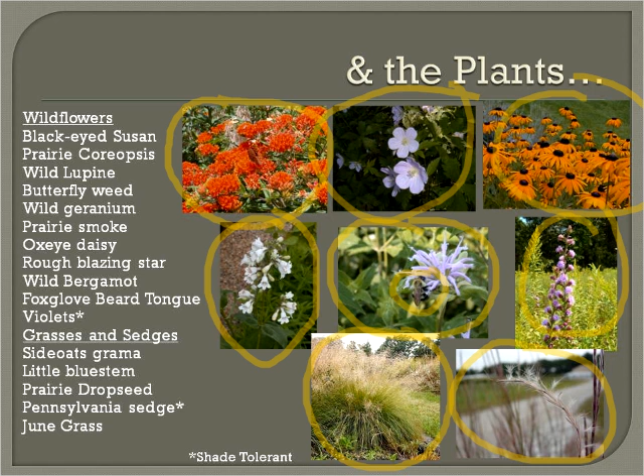Side oats grama, little bluestem. Here's a picture of little bluestem. Prairie dropseed, beautiful grass. This is native, but really can be used like an ornamental in a lot of situations. We've been using it more and more to go around certain features that we have because it has such nice ornamental features. June grass, and I want to just move to the next slide here.

You see at the bottom a website. That website will take you to SEMCOG, the Southeast Michigan Council of Governments website for low impact development. Low impact development is essentially a technique where you try to act more like stewards and try to replicate more than you do now the kind of hydrologic functioning of a landscape. So you're leaving more trees. You're not clearing and grubbing as much. You're trying to enhance infiltration with infiltration type BMPs.

But the reason I bring up the manual is because the Michigan LID manual available at the SEMCOG website has as an appendix representative planting lists, and in there, broken up by EPA ecoregion, this is the ecoregion right here. And for most folks on right now, I assume you're in this northern region right here. What the planting list will give you are the native plants for your region.

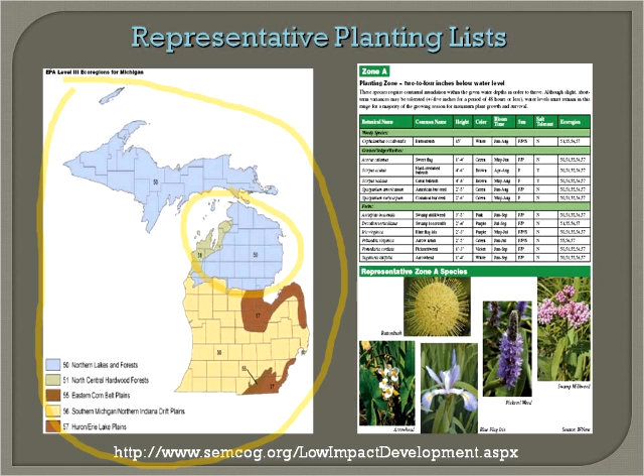It will tell you how tall they generally grow. It will tell you the color of the flowers, if it flowers. It will tell you if it's shade tolerant. It will tell you if it's salt tolerant. And it will also tell you the kind of hydrologic regime that the plant requires. Is it a dry prairie plant? Can it take a little bit of water? Is it a wetland plant? So while I've given you a couple ideas for plants around mounds, this would be a much more comprehensive listing that anyone could use to start making their planting plan.

And that actually is my presentation. Again, the take-home points here. Let us please act as stewards. And the second take-home point is what goes around comes around. Your waste is somebody else's food. So if we think and act and plan wisely, our landscapes can be more soundly ecologically functioning, as well as providing the benefits that we're all looking for.